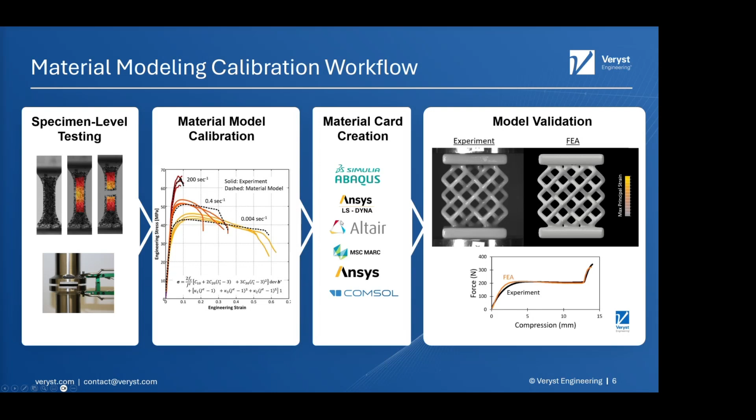Now, with that out of the way, that is a brief introduction of who I am and who we are as Veryst Engineering and what we do. We're now in a position to start our webinar on modeling soft actuators and devices.

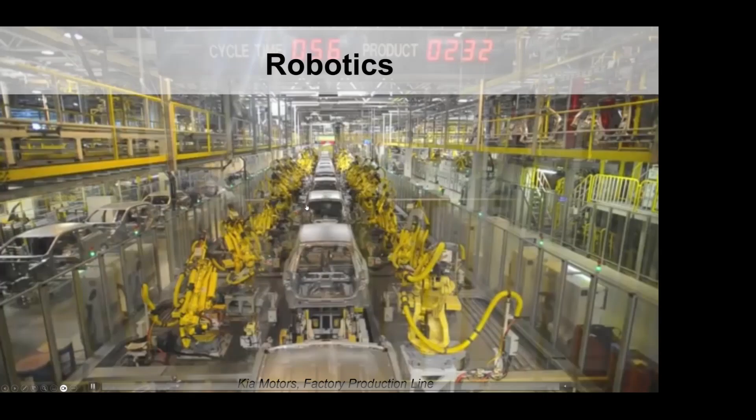So to begin, it is probably fair to say that perhaps the first thing that comes to mind when thinking about robotics in general is something like this. Maybe a little bit old-fashioned to say in 2026, but this is a factory production line from the Kia Motors factory. Robotic arms, rigid links, performing an orchestrated sequence of actions with very high precision. As you can see from this video, interaction with humans is nowhere to be found for safety reasons. This assembly line is separated from the rest of the factory.

In complete contrast, in case you're not familiar, this is what came to Disney's mind when thinking about soft robotics: a squishy, inflatable, very resilient assistant, meant to be a personal nurse and guardian.

Shameless plug here. Incredible movie, by the way. You should watch it if you haven't.

Beyond science fiction, however, soft actuators and devices have been making strides in the real world as well.

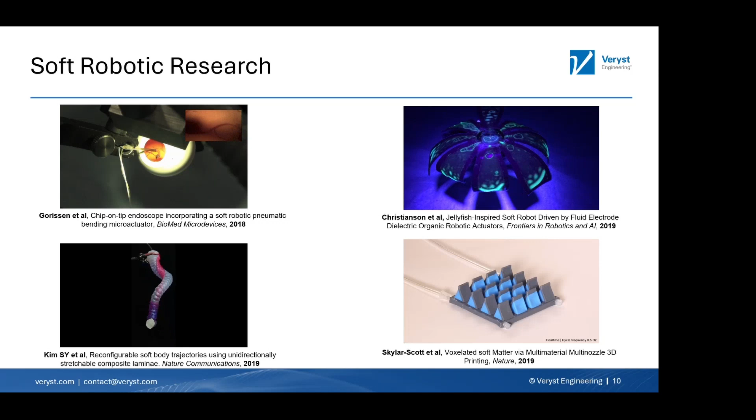Shown by a few examples here from the last decade, from surgical applications, biomimetics, locomotion. Soft actuators can provide unique solutions to problems where traditional rigid robots are not great candidates. They can definitely do things that the rigid counterparts are not able to.

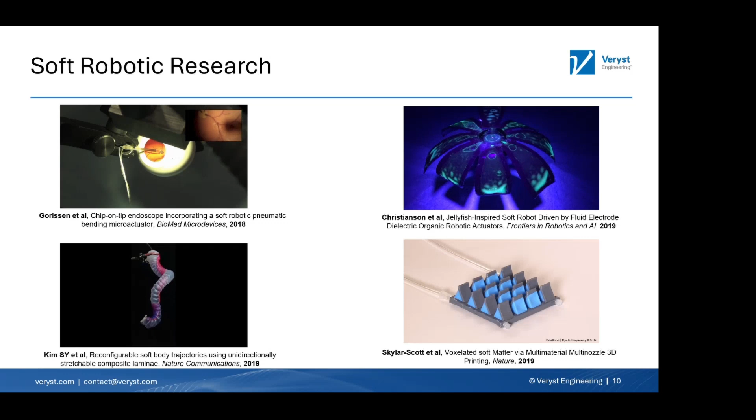At a glance, soft actuators and devices are all distinctly different from one another. They all have different shapes, comprised of different materials. They are controlled using different mediums. Some are inflatable, light activated, piezoelectric, chemically activated. And the relationship between the required input stimulus for each one of these and many more is often quite nonlinear. This is something quite unique to soft actuators and devices. So I would like us to discuss this first.

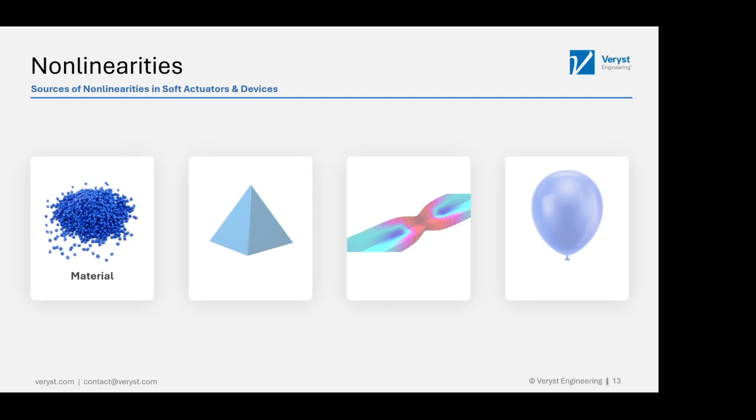Now, nonlinearities, which is what usually, and we'll talk about this, entangles the relationship between input and output or stimuli and response, can come from several different sources. Here, since we're talking about soft actuators and devices, we're going to mainly mention four of them. First, we will begin with the material. The nonlinearities here are essentially what entangles and what complicates the relationship between input and output.

So the difficulty here is that unraveling the relationship between the input stimulus and device functionality is almost impossible through just doing experiments alone when we operate in such a nonlinear space. Because of that need to more intelligently and quickly unravel this relationship and determine what is the output for a given input, we are in need for computational modeling, something that will greatly simplify the process of predicting the response of a soft actuator or device.

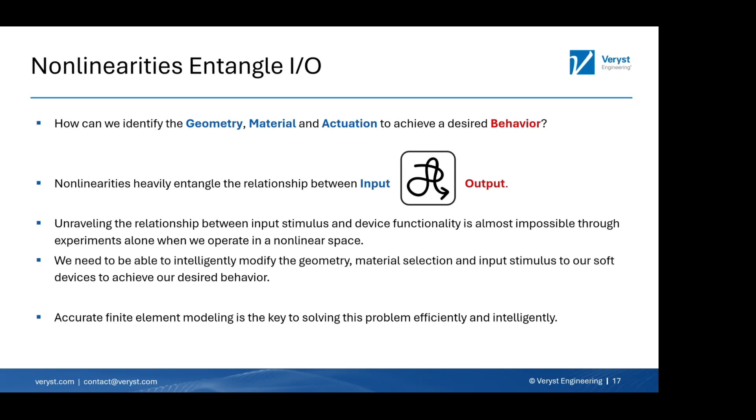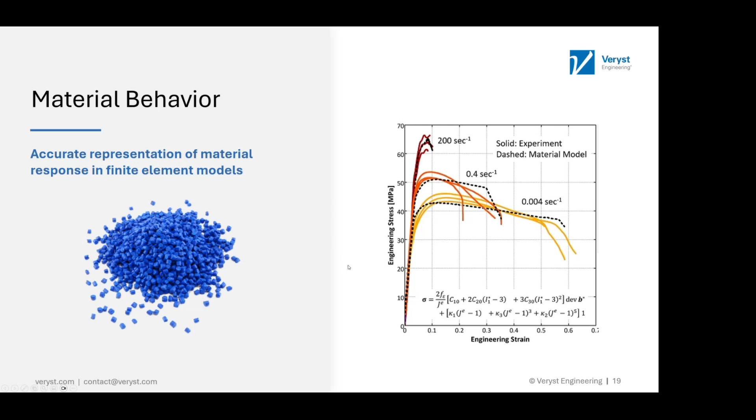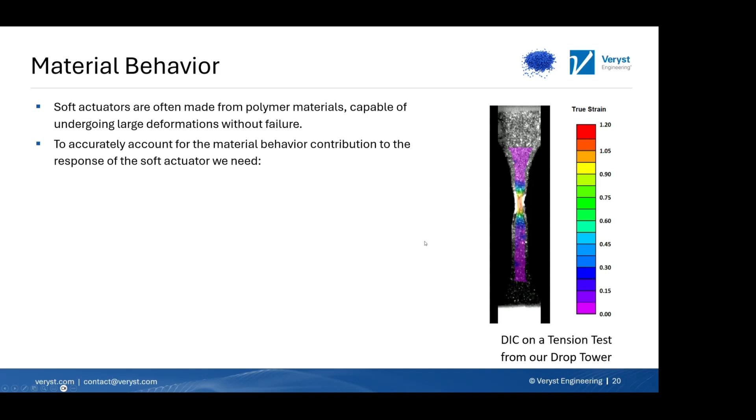So beginning with the material, most soft devices consist of one or many polymer materials, the behavior of which is very rarely linear. Polymers exhibit nonlinear elasticity, hysteresis, temperature dependence, and many more features that make the behavior appealing for several applications, but simultaneously challenging to describe, capture, and predict. And this is something that we do a lot of at Veryst Engineering.

We are in need to be able to understand the response of polymer materials and to be able to accurately describe it. We need well-designed experiments that allow us to determine the key material properties, such as small strain modulus, strain limit or onset of failure, time-dependent behavior such as viscoelasticity or viscoplasticity, temperature dependence, sometimes all of the above. And we need all of those to be able to plug into material models that accurately represent the observed material behavior in our finite element models.

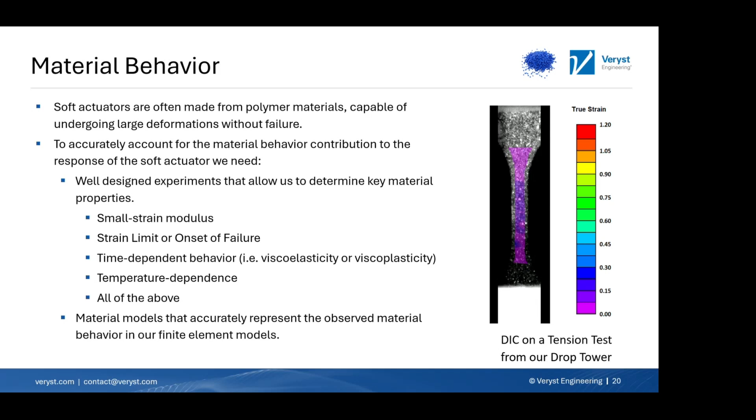Here to the right, we're showing a DIC of a tension test from our drop tower. These are tests that we do almost every day here at Veryst, testing different polymer materials to be able to measure, quantify, and model the response of different polymers.

However, we should not adopt a binary approach to material model complexity. In the sense that if we go from simulating, for example, a silicone rubber using an isotropic linear elastic model, it doesn't mean we will end up with a better model necessarily if we conduct every single possible experiment and calibrate a super complex material model that involves all of the dependencies, temperature dependency, rate dependency. We need to identify what key elements of the material model behavior are important for our application, and conduct a corresponding test to calibrate the most appropriate material model for what we're trying to do.

Now, as you can probably understand, this can be very challenging and requires a lot of experience to get right. What kind of complexity is the necessary amount of complexity?

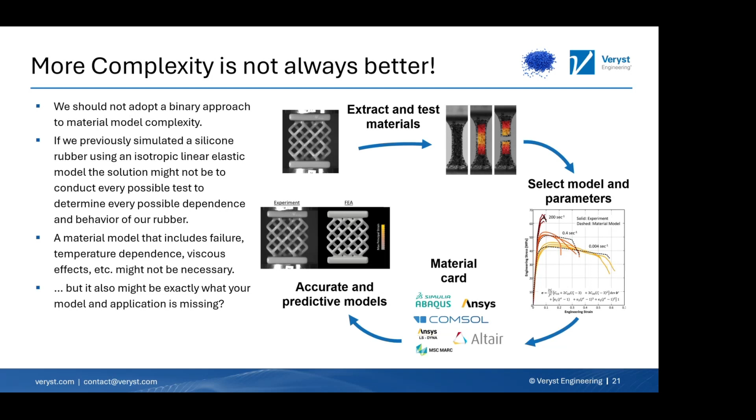So material, as we said in the beginning, is one source of nonlinearity. The next one we're going to talk about is symmetry. Now, the concept of a symmetric solution is not just appealing when we're dealing with analytic approximations to solid mechanics problems, but also in our finite element models. It's very convenient when we can get away with a symmetric model. After all, a finite element model that takes advantage of symmetry can be dramatically more efficient and use considerably fewer resources than a model with no symmetry at all.

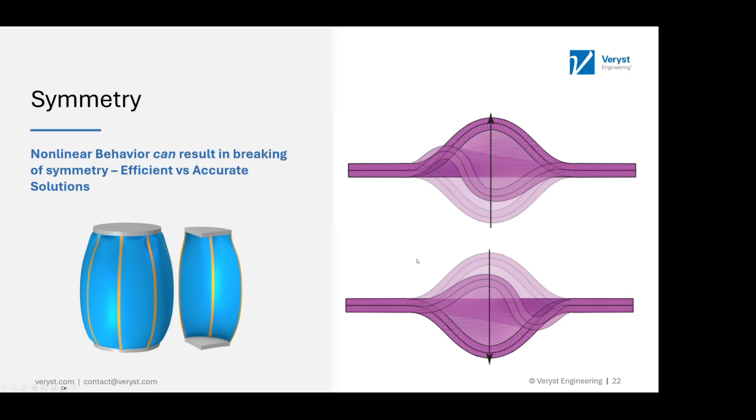However, a frequent phenomenon in problems involving large deformations, and soft actuators and soft device problems are often involving very large deformations, is the breakdown of symmetry. For example, and here we're showing an example that we're going to talk about in a little bit more detail in a few slides, the inversion of a spherical cap. We have a spherical cap that looks perfectly axisymmetric. The problem starts as axisymmetric, but can suddenly, after finite deformation, adopt non-axisymmetric modes of deformation.

And what does that mean? If we model the problem as axisymmetric to start because we see an axisymmetric domain and we're thinking, oh, I'll just model this as axisymmetric, it is probably the smartest way to go about this. It's going to be so much faster. The problem there is that an axisymmetric model is limited to only predicting axisymmetric solutions. This might be obvious to many of you. Of course, if you have an axisymmetric model, you will always be predicting axisymmetric solutions.

However, if we do that and the non-axisymmetric response is something that actually happens in our problem, then we will be predicting a response that is not reality.

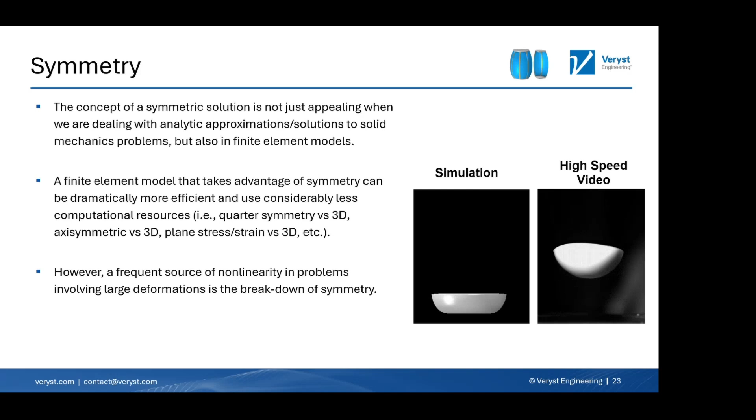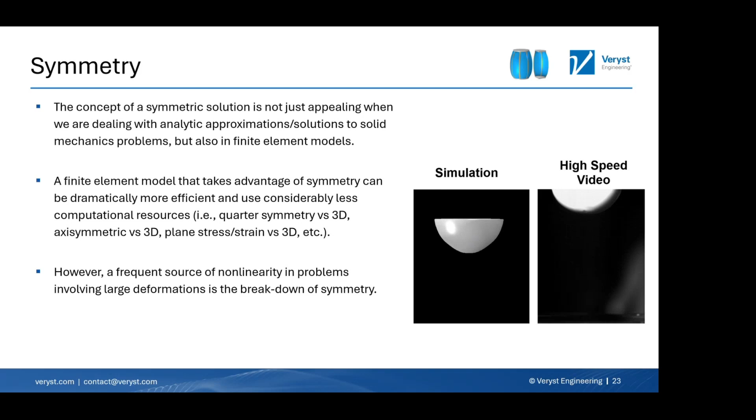Conversely, at the other end of the spectrum, if we do not include any symmetry and we have a fully 3D simulation, then we are also running into problems, because in a problem like this with the inversion of the hemispherical cap, the problem still possesses cyclical symmetry. So if you don't have any sort of symmetry in your problem, you might not have a convergent solution because of that cyclical symmetry. Somehow you need to help the solution enough so that you can get a convergent result, but also include the freedom in your model to express what solutions are possible and to choose the one that requires the least amount of energy.

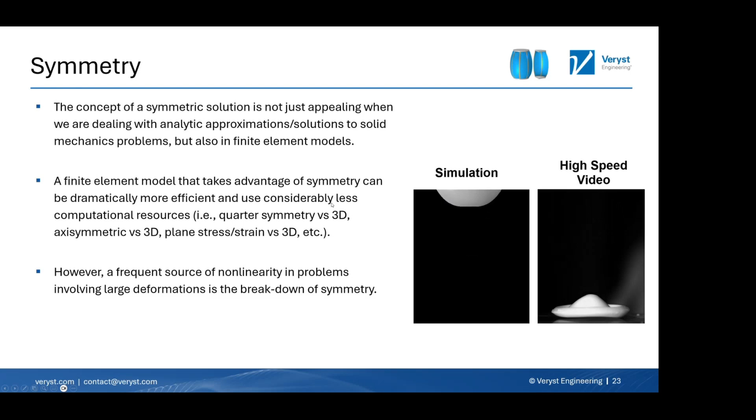So that's another thing that requires some experience to get right. So the advice here is to include only the necessary amount of symmetry. And some trial and error obviously helps there. If you have the capability to run experiments in conjunction with your finite element models, it will greatly help identifying what matters and what doesn't, and what kind of symmetry you need to account for.

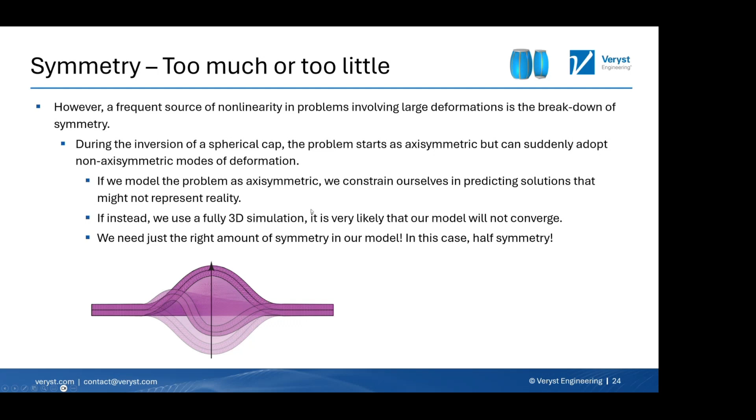So to get to the bottom of this, for the hemispherical cap, for example, half symmetry is the right amount of symmetry. Half symmetry meaning we have the 3D dome and we'll cut it in half, so we're modeling half of the 3D dome. This way, we are predicting solutions that are converging. We are getting rid of the cyclical symmetry conundrum, and we are getting a response that very well represents what is actually happening during the inversion of the spherical cap, as you saw in the previous slide by the comparison of what our model predicts and what is happening in reality.

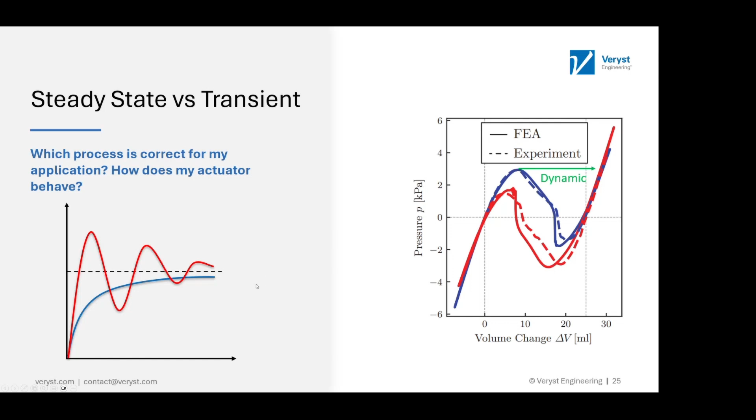One more thing that can be, not a source of nonlinearity here, but a good practice, so to speak, when we're modeling soft actuators and devices, concerns steady state versus transient solvers, or steady state versus transient solutions. I think engineers are generally in tune to search for static solutions in most problems, unless we're dealing with a heavily dynamic scenario. This is not necessarily a bad place to start. Static solutions, however, might not always represent the real behavior of a soft actuator or device.

Now, this is exemplified if the nonlinearities the function of the actuator relies upon manifest in the form of one or multiple instabilities. So it's very common to have a scenario like the one shown in the figure to the right. You have a pressure-volume response, you have a peak, a local maximum, and then, say you're controlling your actuator using pressure, you have a snap-through instability that in reality manifests itself with a dynamic response. So the convergence of a static solver does provide some comfort in trusting the nonlinear relationships governing the behavior of such actuators. However, in the presence of instability, static solutions often do not represent reality.

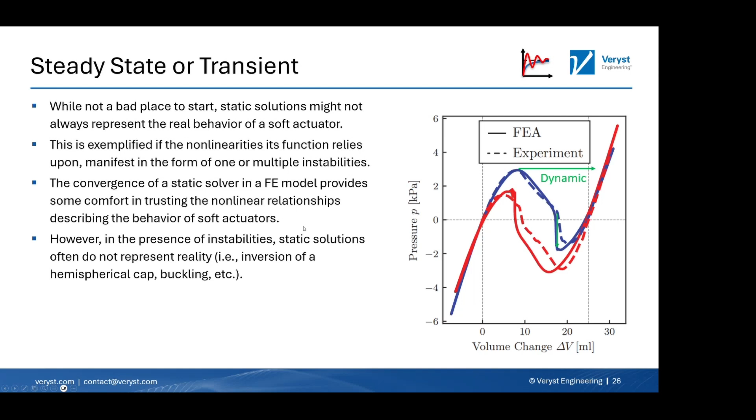Again, one example might be the inversion of the hemispherical cap, as we saw from the previous example: when we invert that hemispherical cap, we have a sudden release of energy that makes those rubber domes jump. So in such cases, a dynamic solver might be more appropriate. The reason is that the elastic energy stored in the actuator or device prior to the instability can often be rapidly released in the case of a snap-through or snapback instability and converted into kinetic energy.

Such a conversion is not even allowed. It's fundamentally prohibited in a static solver. Everything has to be in perfect static equilibrium. There is not even the possibility for kinetic energy in the system.

Additionally, some extremely complex problems can benefit from an explicit integration scheme that some of you might be already familiar with. While a very powerful tool, explicit integration schemes, explicit solvers, should be used with a lot of caution when their predictions are not backed by experimental observations, since their convergence is not guaranteed. They're predicting a solution, but you don't know if that solution is actual reality or if it's just garbage being integrated over and over through time. So using explicit solvers to compute the solution of fundamentally static problems is typically computationally inefficient.

So in this case, again, we have to be smart about identifying what kind of problem we're dealing with and selecting the appropriate tools for its solution. There is very rarely a one-size-fits-all solution. You have to adapt depending on what you are working with.

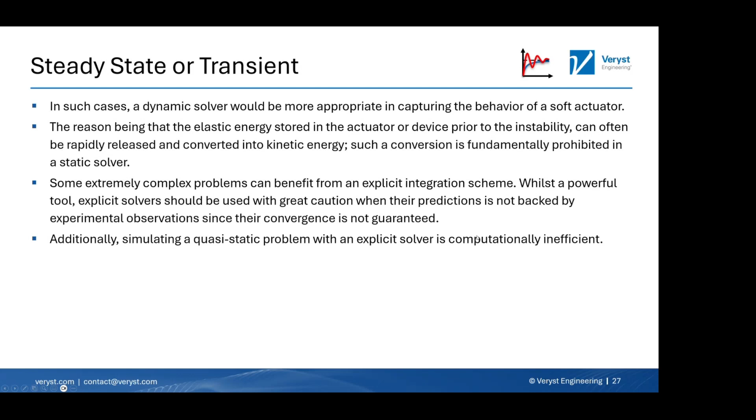I want to go through a couple of examples where we see the sources of nonlinearities. We see some of the best practices that we talked about regarding how we model the material, the choice of symmetry, and the choice of solver, for example, and showcasing what we can do. And maybe you find some similarity there in some of your applications. Maybe you draw some inspiration for something you would like to model yourselves. I hope you'll find them useful.

So we begin with one example that we already talked about, answering essentially the question of how a pop-up rubber toy jumps. You might have played with one of those. In this case study, what we were trying to understand through experiments and also finite element modeling is essentially the mechanical behavior behind this jump. Even further, we want to be able to predict the jumping height as a function of geometry and material properties.

You can imagine a situation where, of course, this being a case study, it's not dramatically interesting, but if you have a well-developed accurate model for something like this, you can tune your parameters, such as how the material behaves or how the geometry changes, and you can see immediately how that affects jumping height, if your model has that predictive ability.

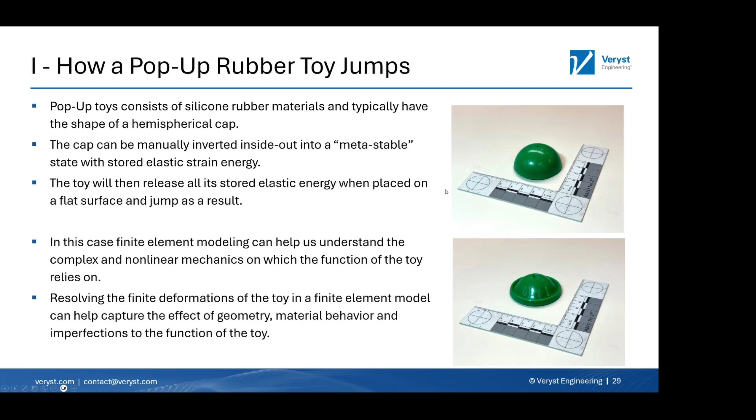Now, these toys typically consist of a silicone rubber, and they have the shape of a hemispherical cap. The way this works is you manually invert it inside out. So you introduce a lot of deformation in the form of elastic energy stored into the system. Now you place this on a flat surface, and due to friction and other mechanisms, after a few seconds, typically, all of this energy will suddenly be released, and the toy will jump, and it will also make a loud popping sound, which fascinates kids.

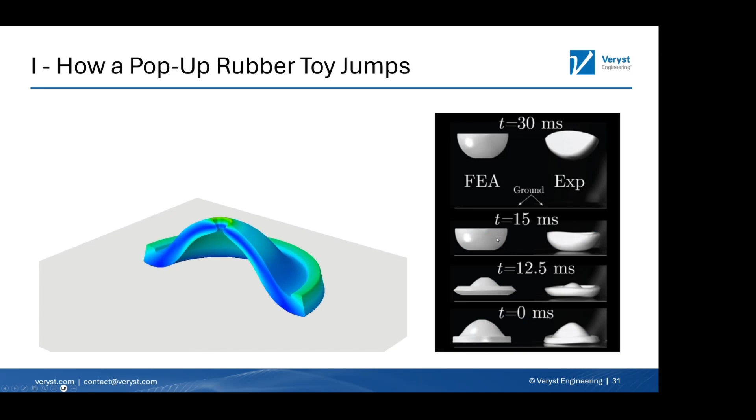Now, doing a simulation allows you to be very quantitative about how much energy exactly you're storing, how quick the transition is from the metastable state to the initial state, and whether there are other states that could be stable in the process. And this, as you can see, is an analysis that uses 3D simulation with half symmetry. It has the right amount of symmetry here to be able to fully predict the path of deformation from one state to the other. In this case, our finite element model utilized all three best practices that we talked about. We used a finite element model with just the right amount of complexity.

The material model behavior was just simply nonlinear elasticity. We performed a test in our lab to measure the response of our silicone up to moderate strains, and we calibrated a hyperelastic model to that behavior. So that's what we used in our material model.

We used half symmetry to allow for the slightly non-axisymmetric inversion of the snap and the snapback of the cap. And we used the dynamic solver, since the inversion of the cap and the jumping is a dynamic process. As you can see in the image to the right, we are able to predict not only the temporal response of the jumping with great accuracy, but also compared to experiments. You can dive into the case study for more details that's posted on our website.

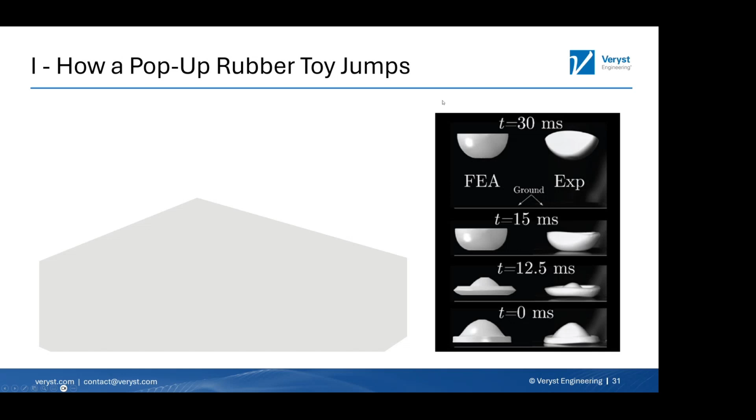We were able to very, very accurately predict the jumping height. So, best practices that went into that.

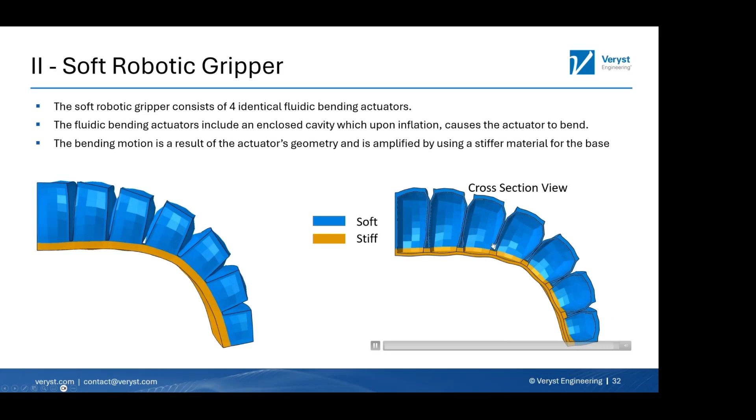What I would like, however, to talk about here is the nonlinearity in the pressure volume relationship, which is essentially the input and output of our system. Either way you think about it, for example, if you're controlling pressure, you have a change in volume. If you have a change in volume, you're modifying the internal pressure of the system.

There is an inherent nonlinearity there that manifests in terms of curvature of the system, but we're looking in the pressure volume space, which is the state diagram for our actuator, and there is a nonlinearity there. Now, somebody naively could perform a very simple experiment, measure the initial stiffness, and assume the system will behave linearly. And we would be terribly wrong if we did that, because I just pick here one example.

The blue curve is the actual response of the system, and even though it might not seem like that, the gray dashed line is a linearized response about the base stiffness in the beginning. It looks like the stiffness is wrong here at the beginning, but if you zoom in all the way to zero, this is kind of like the stiffness that you're getting. It might not end up being a terribly bad prediction for super, super high volumes. The curves do meet up again, but that's just coincidental.

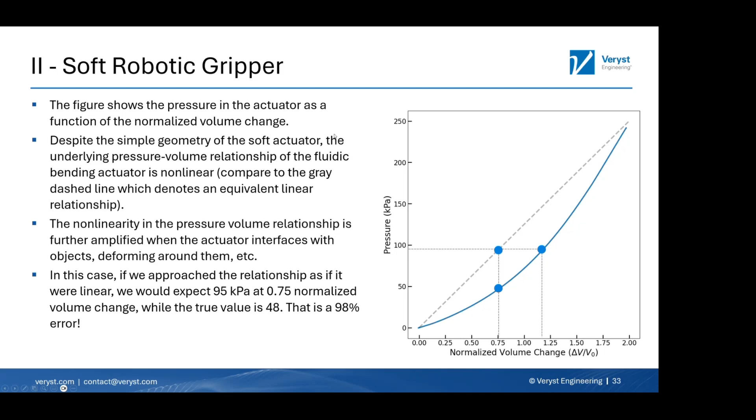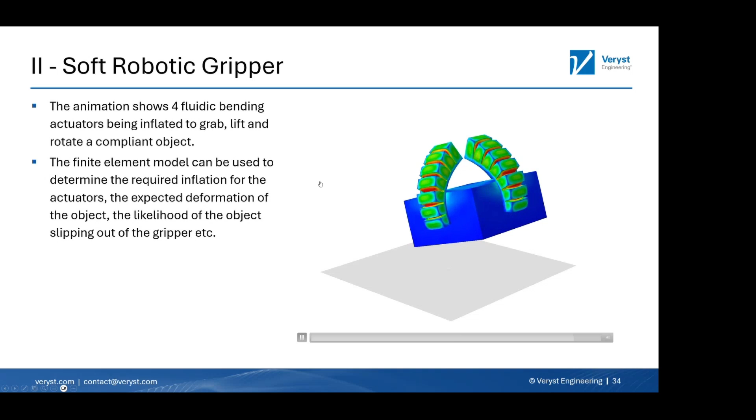How much pressure do I need to hold on different objects of different stiffnesses or different weight, and different frequencies when I'm shaking the object, and things like that. Things that are typically more time consuming and require more effort to be answered in a laboratory setting. Having a model like this is incredibly powerful.

Now, finally, I have one final example here. There's not so much in the nonlinearity here from the behavior or the modeling perspective, but there is the niche of the multiphysics interplay here between electrostatics and mechanical or fluidic actuation. So here we have what we call a piezoelectrically enhanced artificial muscle. So you have a sort of artificial muscle.

In this case, it's a cylinder that has some piezo strips. Those piezo strips, because they're significantly stiffer than the elastomeric base that is shown in blue, when we mechanically actuate this, when we pressure drive this and we increase the internal pressure, those piezo strips don't want to elongate at all. So what happens is the actuator kind of balloons, and it contracts exactly like a muscle would.

So when we supply pressure to the system, it expands and reduces in length. So if there was something attached to this actuator, it would lift up. If there was a weight, we would lift that weight. However, because of that piezo strip, there's another way we can achieve the same kind of thing. Instead of applying pressure to the system, we can apply voltage to the piezo strips.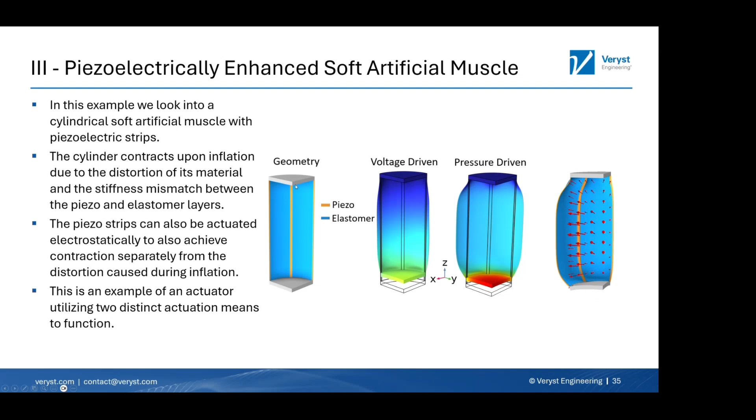This space of actuation that can be driven either using electrostatics or pressure is really complex to navigate with experiments alone again, and it's surprisingly easy to navigate with a multiphysics simulation. This one we did in COMSOL Multiphysics. So this is why I chose to talk about this here.

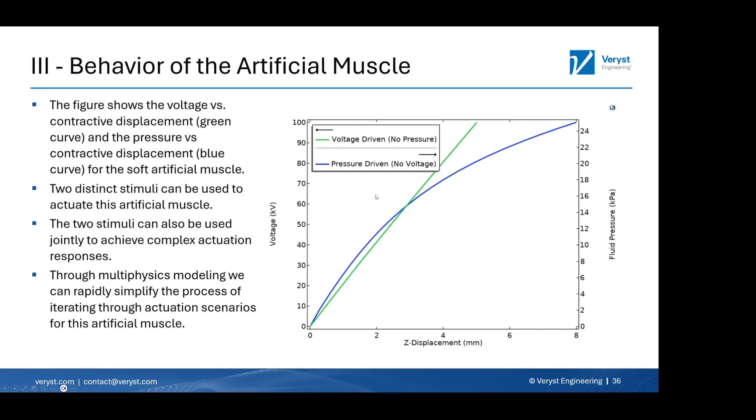The response obviously is much different. It's much more linear in the voltage space. It's more nonlinear in the pressure space. Having that capability to have two mechanisms that are independent from one another that allow you to interface with your actuator is really powerful. It can enable a lot of very interesting things that a simulation can very easily predict. And then you can go hopefully in a lab setting or in reality to verify that those work indeed.

A few of them I've chosen to show you here where we have what we call combined actuation. So we have pressure on top of the electric field. So in this top one here, we're pre-inflating the pressure at a given level, ranging from 13 kPa for this blue curve all the way to 51 at the top for this yellow curve. So that sets the base state for the actuator.

And then on top of that, we add an oscillating voltage, an alternating signal that allows us to have some oscillation about this base state. So this amount of control is possible because we have two ways of interfacing with the actuator. And a much more complicated one here at the bottom where both the voltage and the pressure are varying with time. And we are plotting the displacement and the pressure profile.

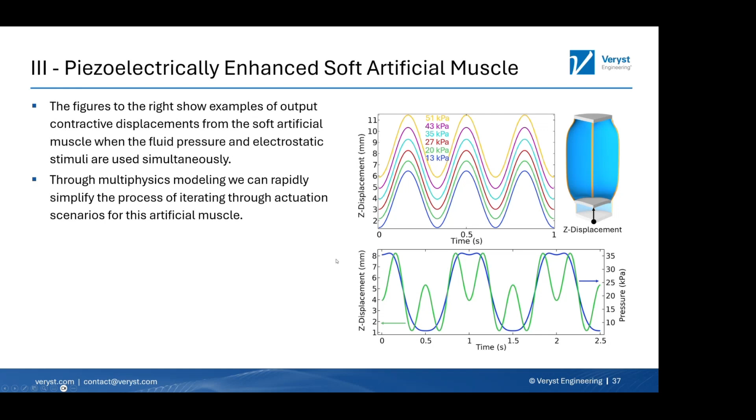The displacement, I think, is what is mostly interesting for an actuator like this, is oscillating and taking different values over time. You can also think about cases where you would optimize this to something that you would like the actuator to be doing. Again, something that can fairly straightforwardly be done with a finite element model, but not so easy to tackle just running experiments on an actuator like this alone.

So with that, I want to recap and say that when we're dealing with modeling soft actuators and soft devices, there are a lot of sources of nonlinearities.

The four that are, in my opinion, most prominent to soft actuators and devices are material nonlinearities, so nonlinearities in the material response; geometric nonlinearities, so the geometry of the actuator might be nonlinear or complex, that introduces nonlinearities in the sense that it's not a straightforward straight beam bending kind of thing. We have nonlinearities introduced due to large deformation. We saw that in the case of snap-through or snapback instabilities, nonlinearities essentially present at large deformations due to those large deformations.

And finally, actuation. Actuation on its own can be a source of nonlinearity depending on what medium you use to actuate your device, whether that's air, an electrostatic or magnetic field, or a combination of those things. You can have an additional source of nonlinearity there. All these things said, nonlinearities are simultaneously what makes soft actuators and devices appealing, but also what makes the response so hard to predict with great accuracy. And this is, in my opinion, why we need good models.

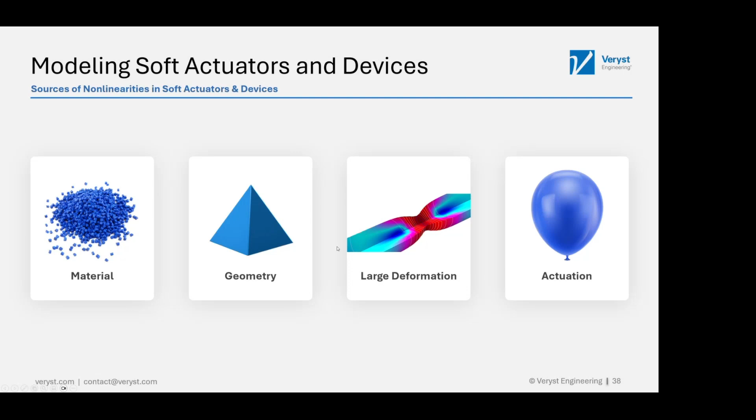So this covers everything that I would like to talk about from a soft actuators and soft devices aspect for today's webinar.